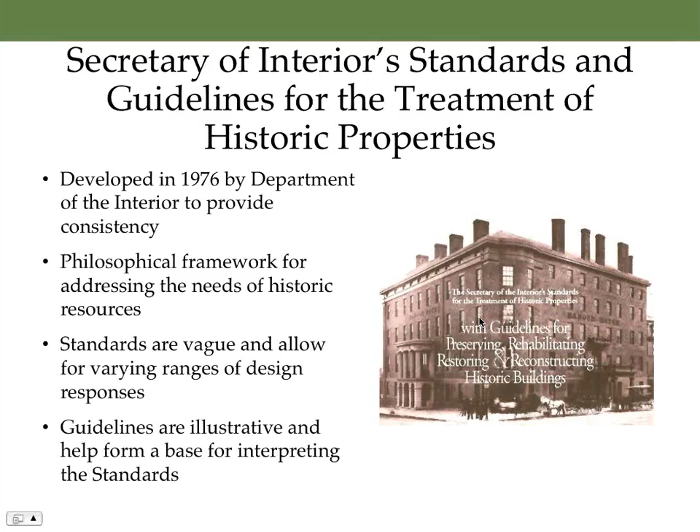Well, first of all, depending on where you're getting funding for your project, you may be required to be compliant with the Secretary of the Interior standards. This can be true for different tax credit programs. The federal and some states do have a tax credit program. California, unfortunately, is not one of those, although hopefully that will change in the future. If you hold a Mills Act contract or have various private grants or public grants, you may be required to be compliant with the standards.

If you are working on a historic property, your reviewing agency may also require that you are compliant with the standards. That could be a local reviewing agency, a county level, state, or federal, depending on where the jurisdiction lies. And the compliance may be required to maintain your historical status. If you're in a national register, a local listed, or a state listed property, then there are certain environmental review processes, CEQA, NEPA, Section 106, that will require that your project is compliant with the standards.

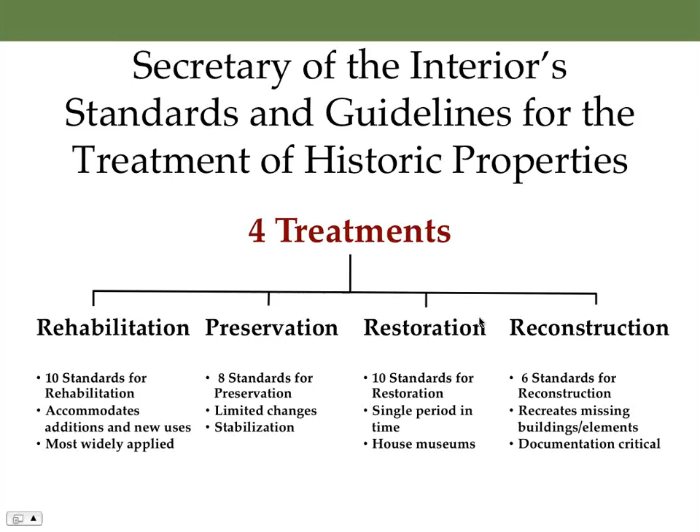So again, you're going to see a lot of repetition. So to kind of cut to the chase, I'm going to break down the standards into 6 points. And these can be true regardless of the treatment. So here are the standards in a nutshell. First of all, choose a use that is appropriate to your building, and try not to shoehorn a use into the building that may require too many changes.

Sorry, there's a bit of a delay here.

The next one is documentation. Try to avoid conjecture and make sure that you have firm, solid, documented basis for the design decisions that you make. You want to reuse and repair as much of the original material as possible. The idea is that you want an authentic experience that is based on an authentic and true representation of the building.

This one's kind of tough. It needs to be differentiated. You can add new elements into a building, but you want to be able to tell that those are not original components of the building. However, you also want to make it compatible. And this is where design really becomes critical and where understanding the nature of your resource becomes critical to find a balance between differentiation and compatibility.

Next one is be ready for archaeological finds. Buildings did not exist in isolation. Generally, when you're dealing with very old buildings, they were constructed on areas that were common habitation for people before that particular building was constructed. So you may have prehistorical finds, but also buildings over time will accumulate stuff, and that stuff sometimes makes its way into the ground. So historical archaeology can be very important, and especially if you're dealing with some of the treatments such as reconstruction or restoration, archaeological finds can actually be quite a source of information for your project.

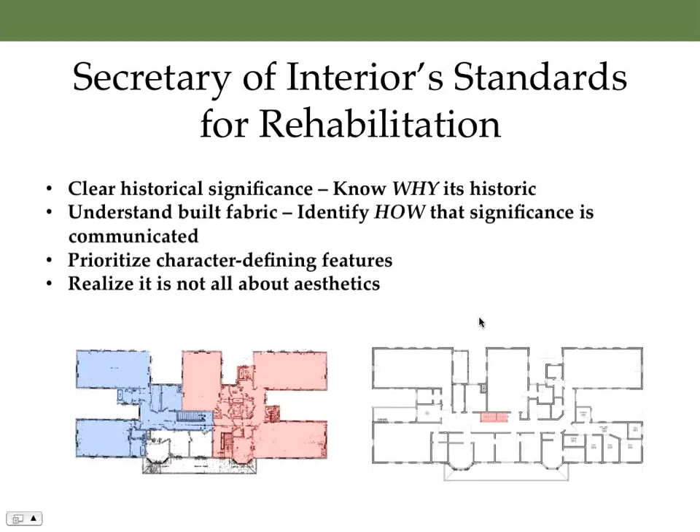Standard 3. Now, this is where you want to be able to read how the building changed over time. You want to be able to take a look and get a sense of how the building developed to get an authentic experience. The idea is not to try to create a false sense of history, but to give an honest assessment of how the building was used and changed by the different people who lived in it.

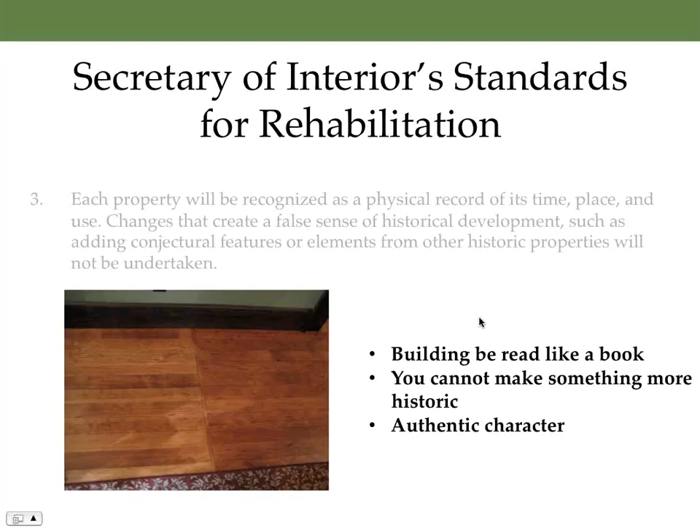Standard 4. This is the idea that buildings do change over time, and that sometimes those changes become historic in their own right.

Sometimes they do not. But in order to understand what is important about a particular building or how it changed over time, you do have to do your homework to determine, was it significant or wasn't it? If it was not significant, you may be able to remove it or to put new modifications in that space that might not be appropriate in areas that have higher historical value.

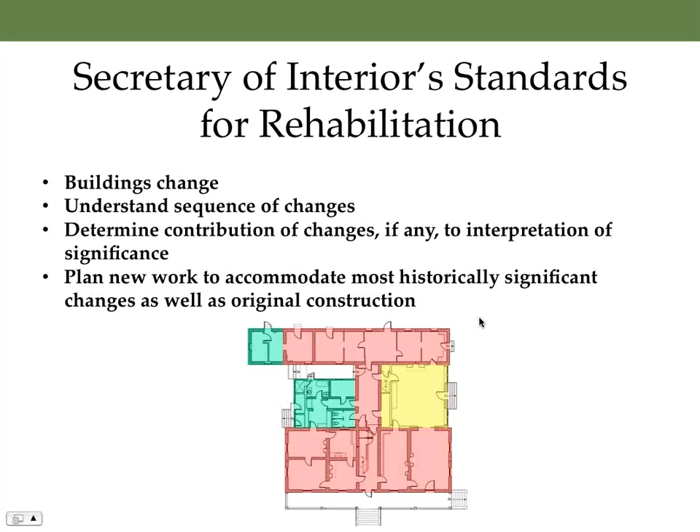The areas shown in green are from yet another owner later on, the Pythians. And now the Pythians are actually why the building is listed on the National Register currently. Therefore, their changes and alterations to the house have also acquired a significance. So the building as it stands now has grown out of these three owners, very, very different owners, each significant in their own right for very different reasons, but they all form part of the construction history for the building. Therefore, in designing a rehabilitation of the building, you have to be cognizant of these changes and of their relative historic status and where modifications would be most appropriate for the new uses that are being accommodated.

Standard 5. Pardon me. This is the idea here that, especially in historic buildings, we're looking at a level of craft and quality that generally cannot be obtained today. Not only do they give the building a character and a patina that cannot be replicated at any price, but these materials are inherently valuable of themselves.

And we're seeing more and more today that in the idea of reuse, of sustainability and reusing of materials, which is a great thing, sometimes historic buildings get cannibalized because of the quality of the materials that are in them. But as a unit, they form a very particular part of the story of the building that should be respected. So not only are they difficult to obtain, but the skills needed to assemble these materials may not be available anymore.

Technology has increased quite rapidly over the last 50 years, and a lot of the traditional building skills have changed or have sort of gone out of use, and it may be quite difficult to try to find someone who is knowledgeable enough to be able to work on your building. So if you find someone, make sure that you treat them well and tell all your friends about them.

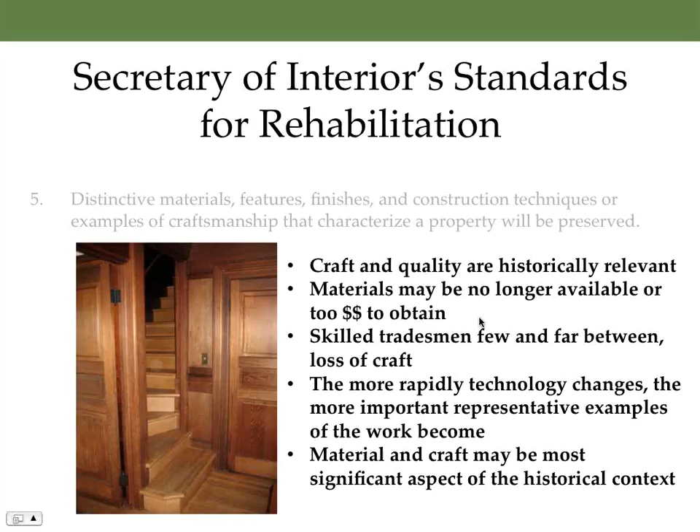So 6, the idea of repair before replace. So not only does it save money in most cases, sometimes it also will save you time. It also allows for the most authentic experience of the space.

And generally what happens when you're introducing new materials into a building, whether it's to repair a material that has outgrown its useful life, or you're looking at altering an existing element, the problem is that new materials are often not compatible or not as compatible. They will weather at different rates. They have different levels of moisture retention, and they will respond differently to temperature fluctuations.

So what this means is that as the building breathes and expands and responds to the atmosphere, these materials are going to react differently, and that can give you cracking or shifting that may damage some of your finishes, as well as possibly other elements of the house. So the idea is to limit the introduction of new materials as much as possible and to plan for them, to try to get new materials that match the old as closely as possible.

The example that we have here of repair before replace are historic windows from a residence in Mendocino County. And what we see on the left-hand side is actually a modified original window. This is a circa 1888 farmhouse. And in the 1920s, the owners remodeled and they did not like the arched windows that were there. And you can see the arched header in the brick, and you can see the wooden infill immediately below that.

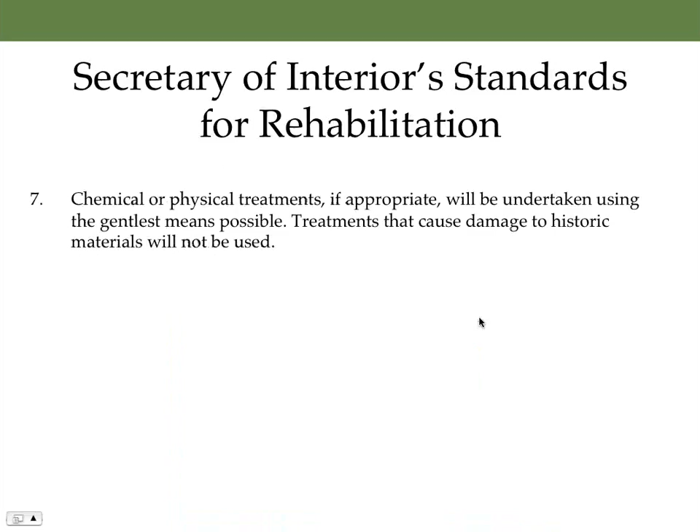This is a recurring theme. You're going to see this multiple times as we move forward in the other treatments. When you actually go through to figure out how to address some of the material deficiencies of the building, you want to refinish something, there are many, many different methods that can be used. And a lot of times people have the best of intentions, but not understanding how materials may react to these different treatments, more damage can be done if they are not aware.

So the idea that we have here is this is wood siding that had many, many coats of paint. This was a former railroad station, so chances are the paint had quite a lot of high lead content. And the owner at the time wanted to go through lead abatement to make the building safe, quote unquote safe, for the new tenant. It was no longer a train station. However, rather than investigating what options may have been available to them, they decided to go with what was a fairly economical choice, and they sandblasted the building.

Now, thankfully, this is fairly good quality wood, and it withstood the sandblasting relatively well, but you can see that the surface quality of the siding was dramatically altered. And since this time, they've had to continually repaint the building because it doesn't hold a paint finish as well, and it's also prone to moisture retention.

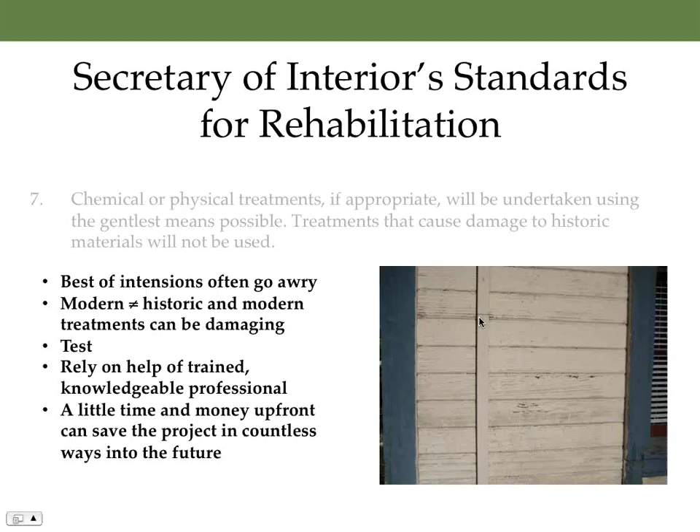because in the end, the treatment that is selected may be less expensive immediately, but it certainly will be more expensive down the road. Because you'll be doing more repairs to the building afterwards, trying to address some of the changes that were inadvertently caused by inappropriate treatments.

So here we go with the theme of the archaeological resources. Again, buildings were used continually, or hopefully they were used continually. They were definitely used at different points in time, and therefore there are going to be artifacts that are found.

When you're working on a rehabilitation, the idea that archaeology may be involved is a little less of an issue because with the rehabilitation, you're usually not doing too much in the way of subsurface disruption unless you're putting in a new foundation or doing a major addition to the building. This is more of a case when you're getting into areas where you're trying to reconstruct or you're dealing with parts of a building and you're working within an area that was formerly occupied by the building.

But just be aware that should you find archaeological resources, you will be required to follow all state, local, and federal laws, and that this is something that they generally look for when looking at historic buildings, just because the chances are higher.

All right, so here we're getting to the big one, additions. Now, contextual design is a standard design practice. The idea of working with a historic building is really contextual design with an added layer. You have to consider not only your physical context and your neighborhood context, but the historical context and the different types of evaluation that are necessary to really understand your resource.

You have to look at the different features and spaces that are included within the building and understand how they relate to the significance of the building and how they are prioritized. You know, are they very significant? Are they less significant? And then look at general design concepts, just scale, proportion, massing, how people circulated through the building, how they used the building historically, how you plan on using the building in the future, and trying to figure out where there are areas of similar uses and similar expectations, and where are there areas where you really need to do some major modification to help make the new use fit.

So if you're following the previous 8 standards, this one should fall into place, although it is one that tends to get a lot more attention than the others, because rehabilitation is the only standard that really allows for new additions and significant alteration.

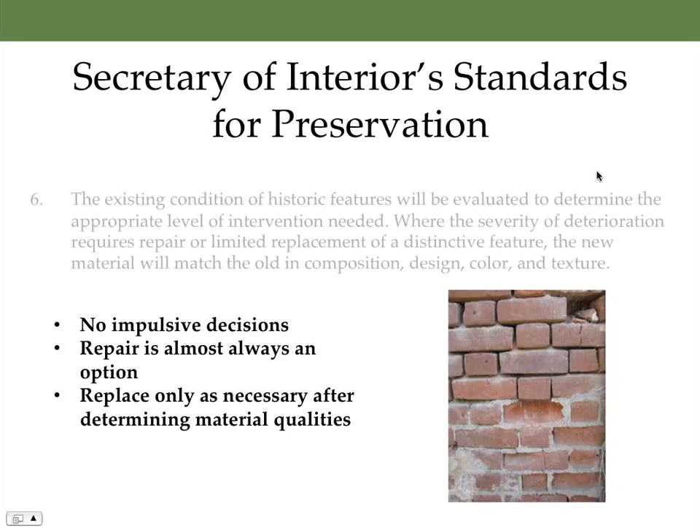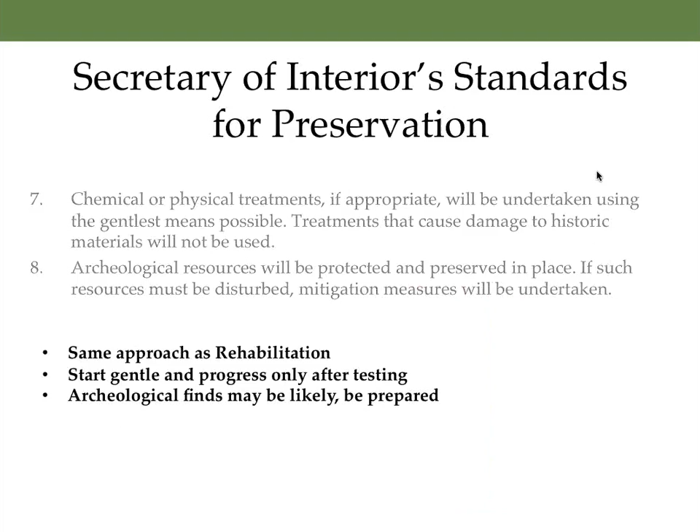So again, more repetition. We're really getting into the chemical treatments and archaeology. These are the exact same as rehabilitation. The idea is that you start gentle with determining what your treatments are going to be and get more aggressive only after testing. And that you should be prepared to find archaeological remains of some sort, and that may not happen, but as long as you're prepared, you generally have yourself covered.

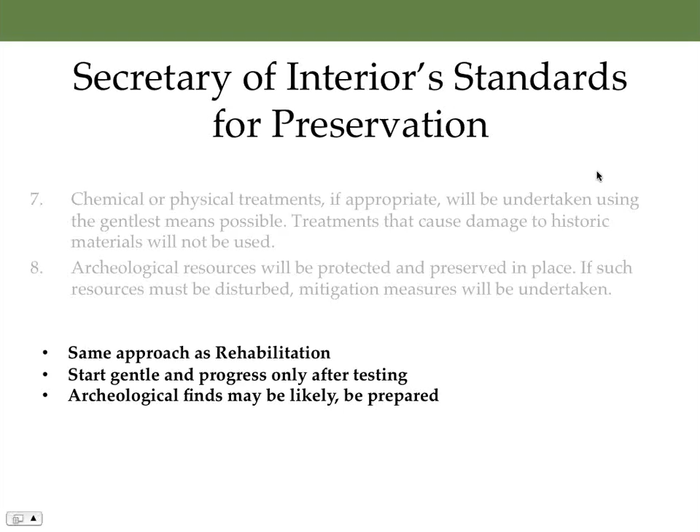So restoration has the most restrictions on use. You really have to have a historic use that is going to be put back in the building because, again, you are trying to represent the building at a particular period of time, and therefore that use should reflect that particular period in time. Close related use could be some sort of interpretive value, again, a house museum. The building was not originally a museum but can function as a museum because you're using it as an education tool to help illustrate an event or a person or a particular period in time. So your documentation has to be absolutely spot on.

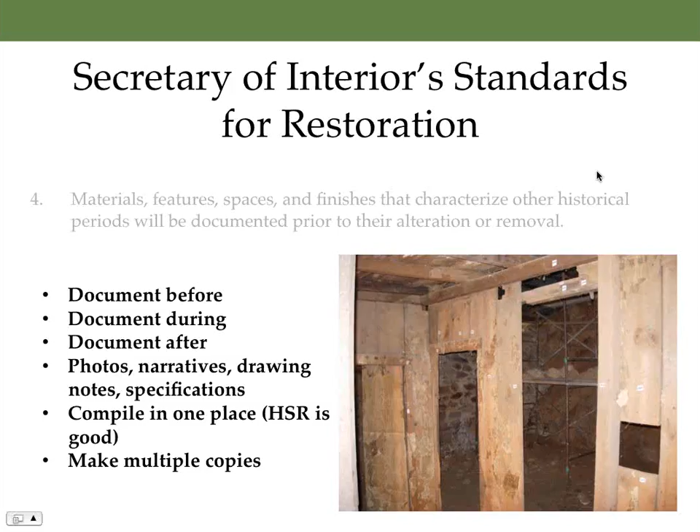Okay, we're going to start doubling up here. Again, distinctive features. I think we've gotten the idea that the items from the period of interpretation have a higher historical value and therefore should be retained and protected very, very carefully while work is undergoing. But also have a plan for how you're going to protect them before you start. Make sure that plan is implemented during construction, and make sure that you have a plan for what to do with the excess material afterwards.

Deteriorated features, they should be repaired. Again, repair before replace. We're looking for an authentic experience, particularly with restoration, because you are representing it as this building in this period of time. You have to be able to distinguish what is original and what is not. And this is the idea where there's really very little gray area under restoration. You really should look at matching it exactly and documenting, or having it be very clearly modern so that there really is no confusion as to what the origins of these particular features may be.

Now, when you're working under restoration, there is a certain amount of changes to the building, obviously, that you're going to be doing, and you should not look at introducing elements from other buildings into the building unless you have very clear documentation that this was a match for what was there originally. Generally, if you can't prove that it was there, then you really should not try to reintroduce it. You must be able to clearly justify why you are making these design decisions.

When you're looking at doing reconstruction, there's a certain amount of investigation that has to go on. Archaeological investigation is quite helpful. You want to look at what remains, look for the various clues. You may be looking for things such as fragments of building materials, traces of building elements, where there were missing pieces, where there might be pieces that have fallen by the wayside.

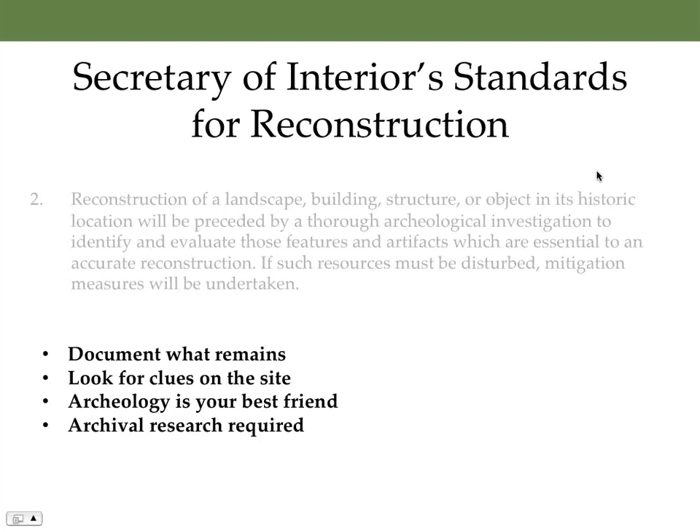Historic archaeology is particularly important here, but depending on the nature of your site, you might want to look at industrial archaeology, if it's a commercial or a manufacturing site. And you might be looking for things like footing locations, size of framing members, foundations, as well as the individual artifacts that may have been associated with use in the building.

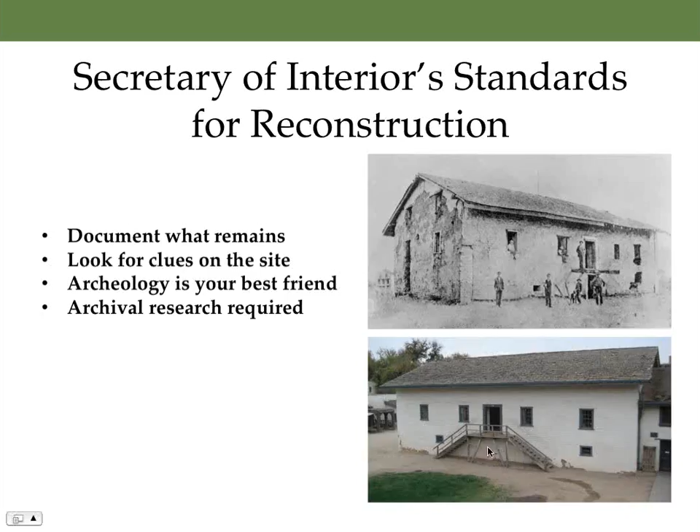Because you're working with such little historic material, what you do have becomes extremely important and extremely valuable. So again, preserving whatever you have becomes that much more important. And sometimes it helps to know what you need to look for in order to know what you're looking for to help you find what you need.

It sounds sort of counterintuitive, but if you're looking at examples from the same period, other buildings that are similar in time, you may get a better sense of what are the type of things that you should be looking at in your building. And also know your limitations. Sometimes you just can't find it, and you should be able to move on or be prepared to try to deal with that.